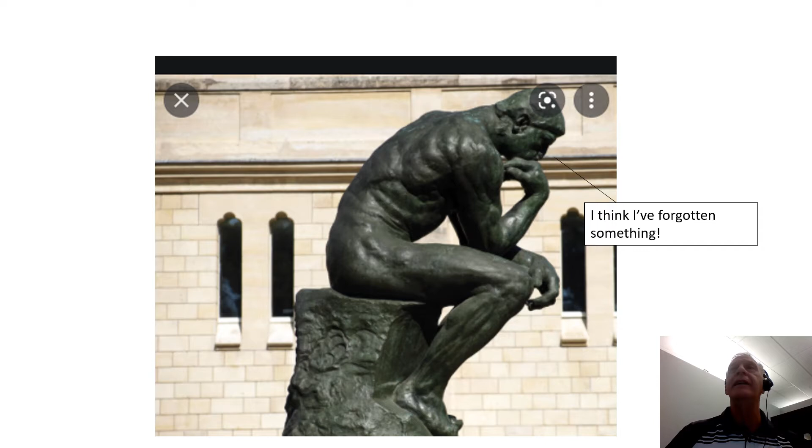The purpose of this talk is not to give you a lot of final results and detailed measurements, but rather to stimulate your thinking about super efficient stoves.

The problem with stoves as they currently exist is that gases have high viscosity and low thermal conductivity. When hot gases strike the bottom of the pot, they form a boundary layer about 6 millimeters thick. Remember that number, 6 millimeters. Gases outside the boundary layer pretty much stay outside it and never transfer heat very well. Gases within the boundary layer move in uniform rows without much mixing. They transfer some heat to the pot, but the final result is that only a small fraction, less than half, of the heat is transferred to the pot. Usually the exit gases are not a whole lot cooler than they were when they first came into the system.

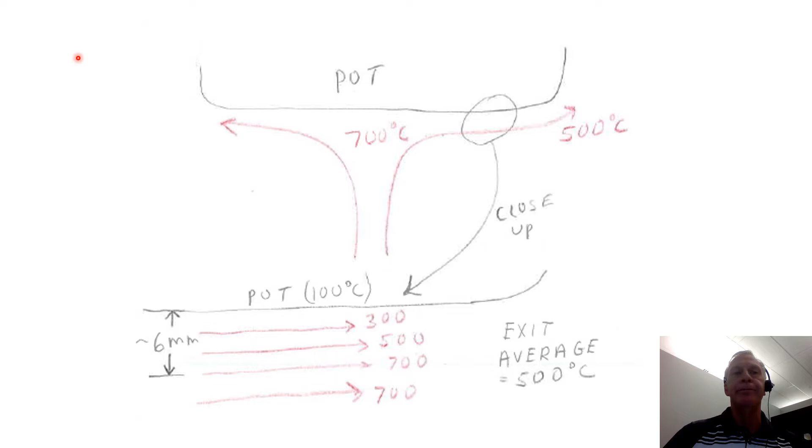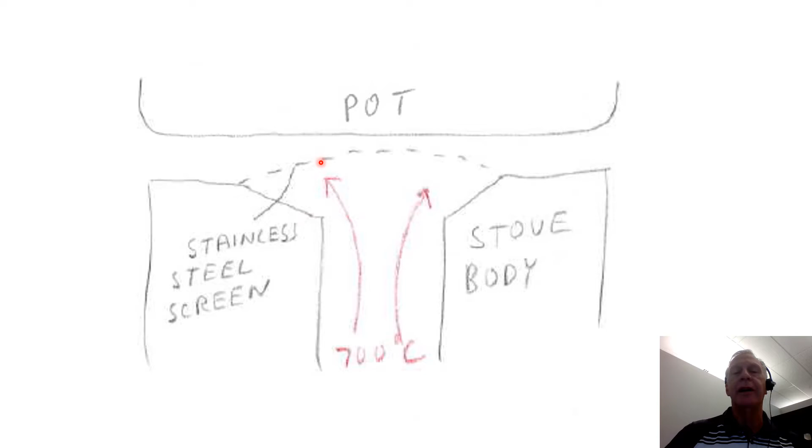This first idea uses enhanced radiation, because radiation can pass easily through the boundary layer. Here, a stainless steel screen is placed over the stove, which intercepts the hot gases and gets hot. The screen radiates heat very strongly to the bottom of the pot. The gases passing through this screen are less hot than they were at the start, but still hot enough that some heat will be transferred by convection. So you lose a little convection, but you gain a lot of radiation, for a net gain overall.

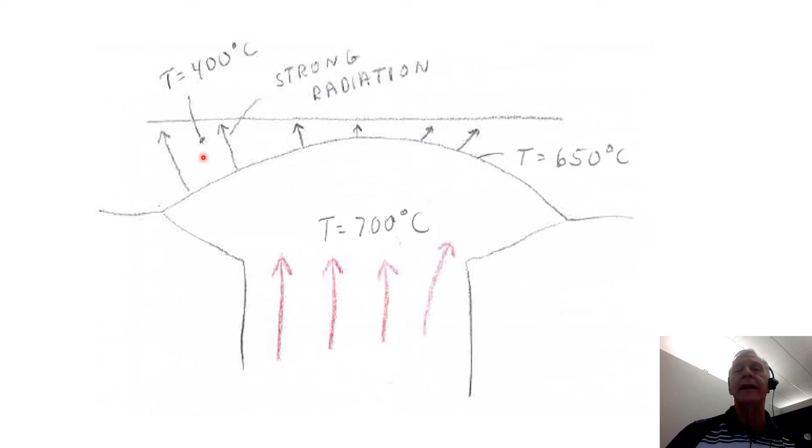The remaining ideas all work by breaking up the thermal boundary layer by forcing hot gas to flow through a narrow restriction. How narrow is narrow? A lot less than the boundary layer thickness, that's how narrow. If the pot is part of that restriction, the heat transfer to the pot should be excellent. And because you have such narrow restrictions, a small fan or blower will probably be needed. I'll say more about that in a little bit.

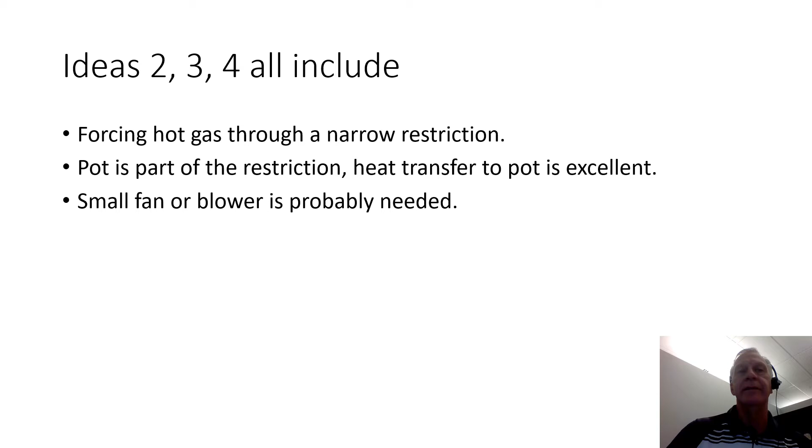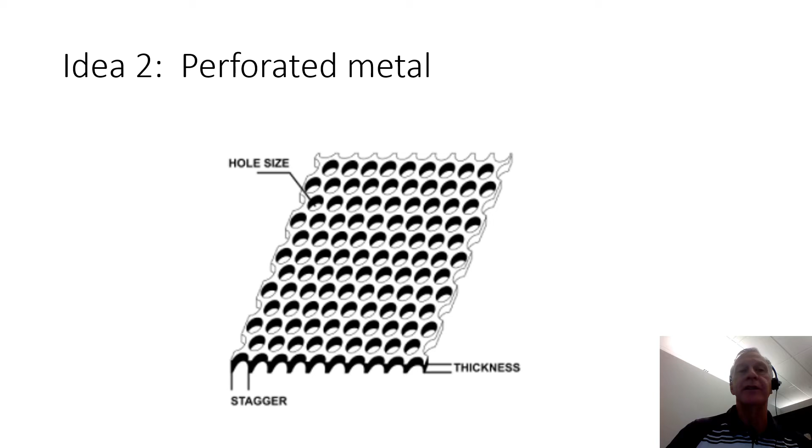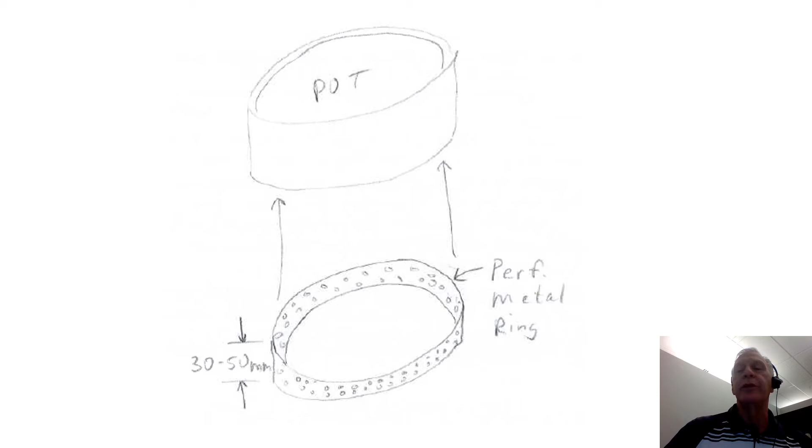The second idea uses perforated metal, which is available in a wide range of sizes and dimensions. A ring of perforated metal is bonded to the bottom of the pot, either by welding or brazing. In reality you'd probably use more like 3 rings, but I'm only showing one here for clarity - and I acknowledge these are not exactly 21st century graphics, but imagine I'm standing at a chalkboard, perhaps covered with chalk dust, writing really, really fast. So the ring or rings of perforated metal are bonded to the bottom of the pot. The hot gases flow through the small holes in the perforated metal, which gets very hot and conducts heat into the bottom of the pot.

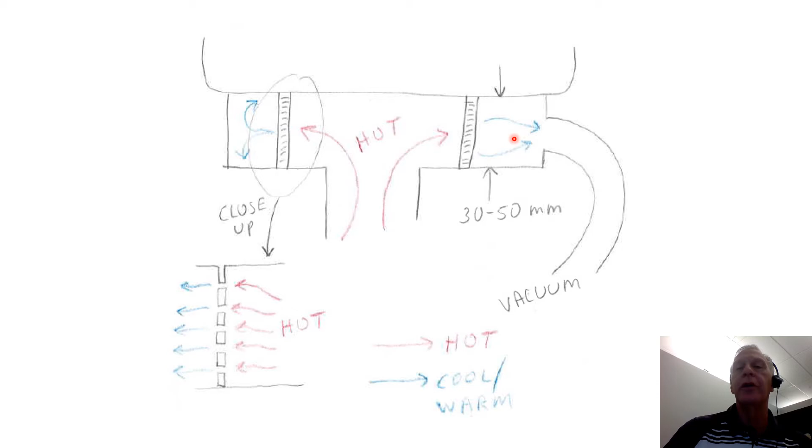A vacuum system, about which I'll say more later, is used to force the gases to flow up through the stove, through the small holes in the perforated metal ring, into the outer shell where the gases are much cooler, and then into the vacuum system. Looking at the same thing in a bottom view, the hot gases come up and out of the stove here. They flow radially outward through the small holes in the perforated metal ring into the outer shell, at which point they're much cooler, and then get sucked out into the vacuum system.

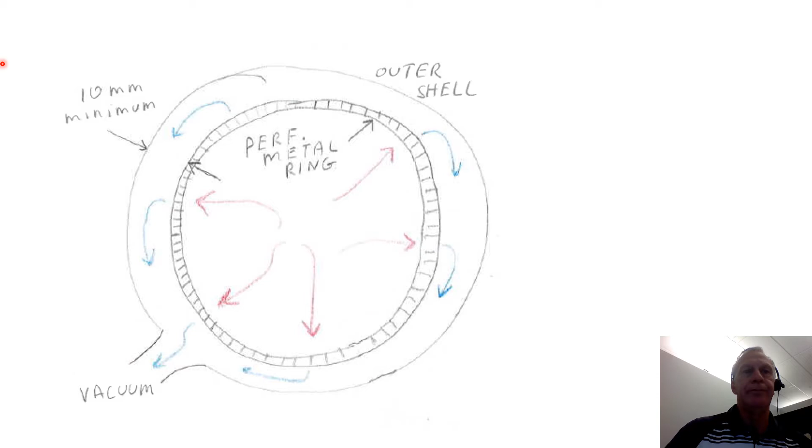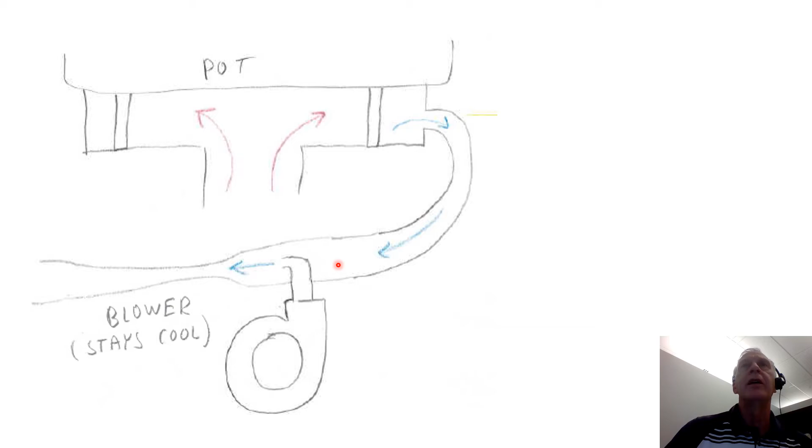There are a number of ways to produce a vacuum simply. One way is to use a small plastic blower, which costs only about $1 and consumes maybe 3 watts, to produce maybe 1 inch of water pressure. Blow that through a jet injector, which creates maybe 1/4 of an inch of vacuum, and that should be enough to get the air to flow through the small holes in the perforated metal ring. 1/4 inch of vacuum is a lot more than any natural draft stove can produce.

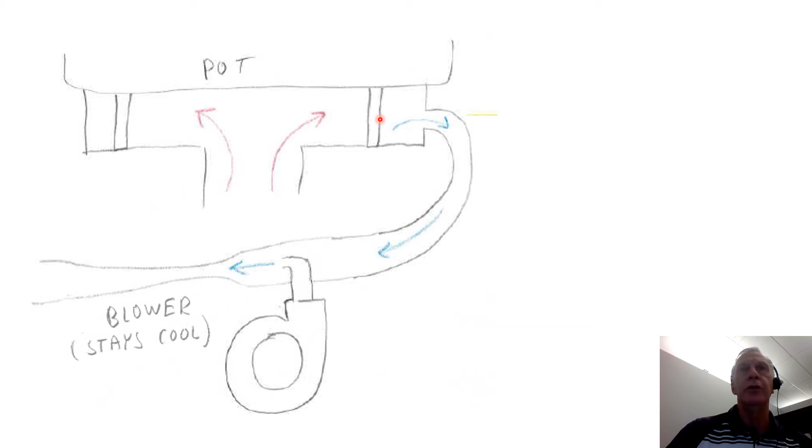The next idea is what I call the narrow gap idea, in which the hot gas from the stove is sucked into a shell and forced to flow through a narrow gap very close to the bottom of the pot. Since the thickness of this gap is much less than the thickness of the boundary layer, heat transfer from the gas to the pot should be excellent. Again, you would have a collection ring around the outside of the system and then a vacuum system to get the hot gas to flow.

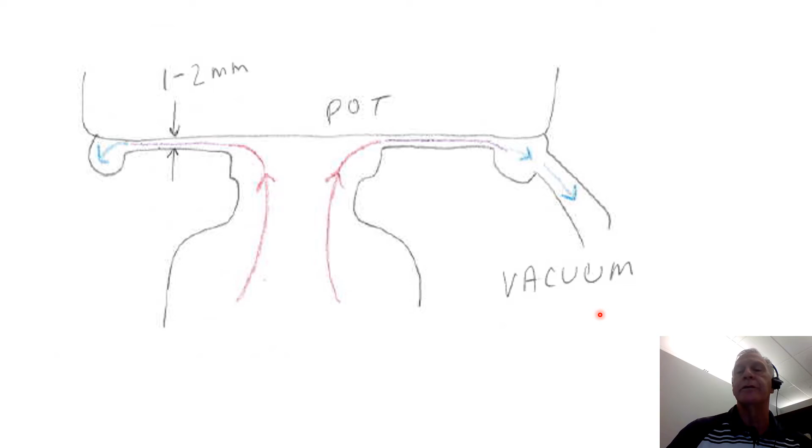On the shell, you would probably have a series of protrusions to hold the gap at its proper dimension.

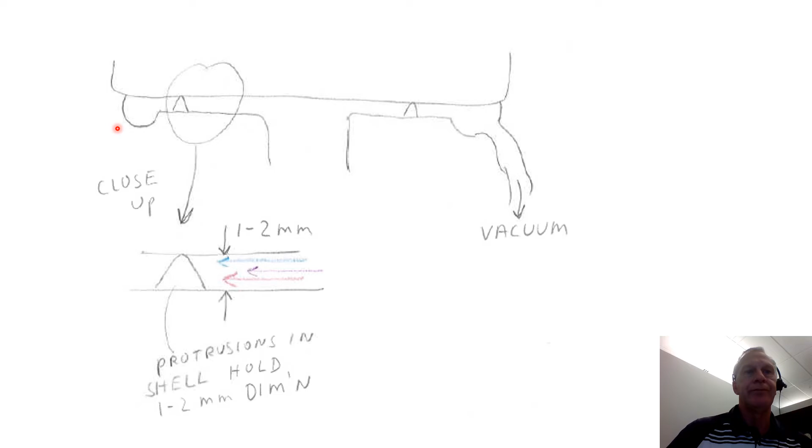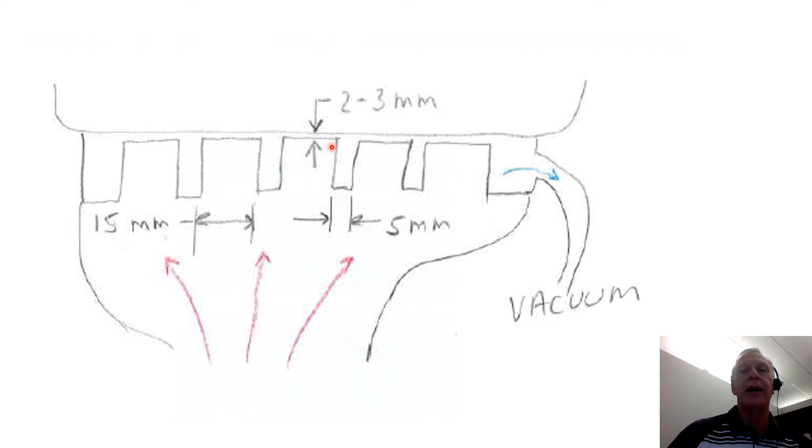The final and most complicated idea is what I call the impingement heat transfer idea. You have a corrugated metal shell with high, wide corrugations that are very close to the bottom of the pot, and then some lower, narrow corrugations down here.

In the high, wide corrugations, you have a series of small holes or a slot, so hot gas is forced to flow through that series of holes, getting excellent impingement heat transfer in this region, and then pretty good heat transfer in this region because of that narrow gap under the bottom of the pot, and then poor heat transfer in this region, but by then the gases have given up most of their heat.

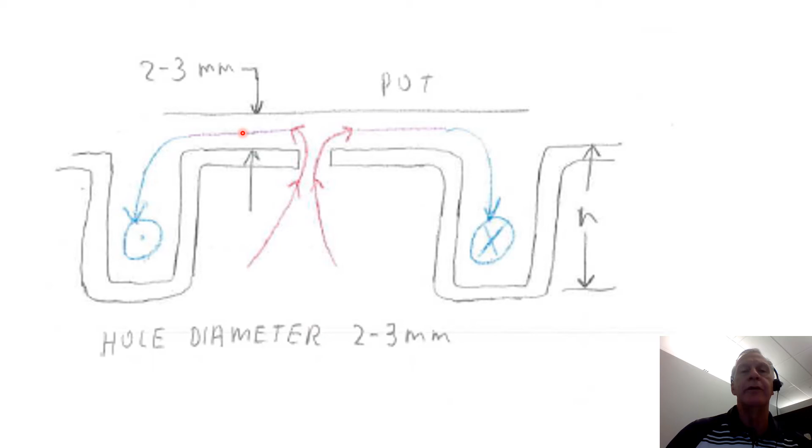They drop down into these lower corrugations where they can flow easily either away from the viewer or toward the viewer, depending on which is the shortest path. Dimension H needs to be fairly large, maybe like 30 to 50 millimeters, but you should get excellent heat transfer over this entire region of the pot, and thus excellent heat transfer overall.

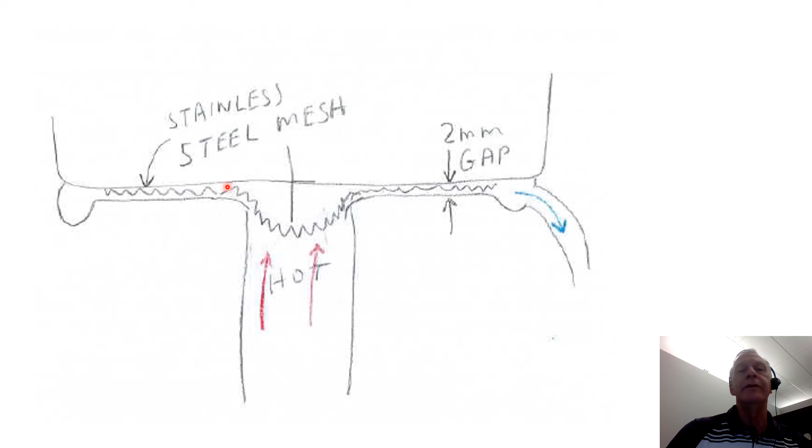You may be able to combine these ideas by putting a stainless steel mesh into the narrow gap idea, getting very good convective heat transfer because of the narrow gap, and then very good radiative heat transfer due to the stainless steel mesh.

Similarly, you could use the stainless steel mesh in conjunction with the corrugated metal idea, again to get radiation from the stainless steel mesh, and then the excellent convective heat transfer within that narrow gap.

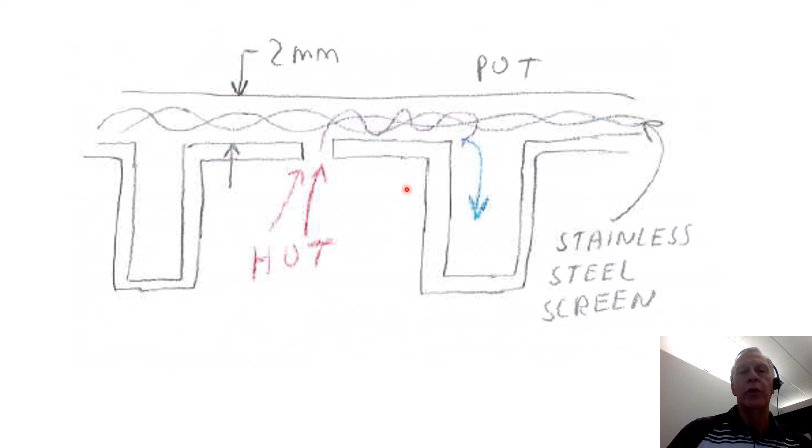In addition to saving fuel, there are practical benefits to getting higher efficiency. We've done a lot of surveys with what users really want from their stoves, and I'm willing to bet that not once has anyone ever said that their stove is just too powerful.

They will say, however, that their stove perhaps burns their delicate foods such as rice. So I believe any of these ideas can be used to get both more power and more uniform heat transfer for less burning of the food.

Since you need less fire overall to get the job done, you could possibly get by with less tending of the fire and then possibly lower cost overall.

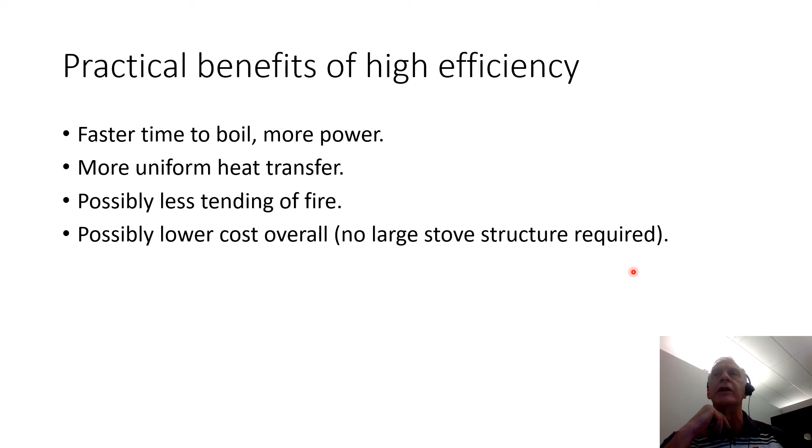What I mean by that is that our best method for getting very high efficiency currently is to use what's called a sunken pot stove, which has a lot of structure to it. With these ideas, there's a lot less structure, so I believe that you could get higher efficiency and lower stove cost at the same time.

Some limitations on these ideas are that they would typically work well for clean burning stoves only, and except for the radiation idea, flat bottom pots only. And then of course there's the extra complexity that you would need with the blower and the power to run it, which I don't think is particularly all that bad or all that much, but it is an extra step of complexity that's required.

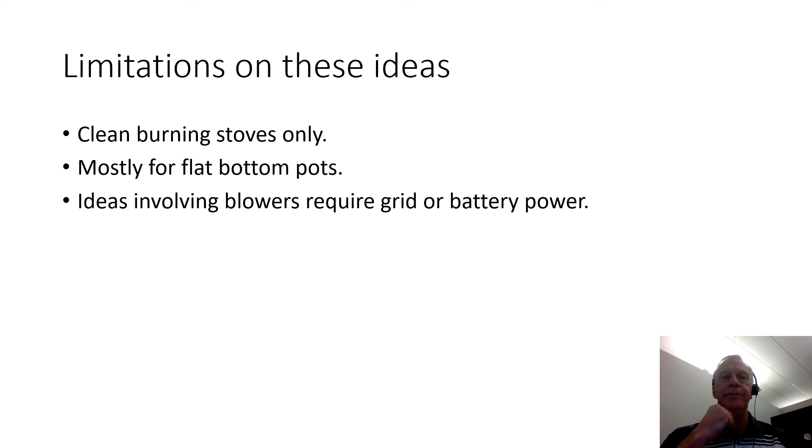Some opportunities here are these ideas would work best when the users pay cashola for the fuel and thus have a strong incentive to save fuel through a higher efficiency stove. That of course leads immediately to the institutional stoves, which fit that requirement perfectly.

I don't know that much about carbon financing, but I expect that there would be synergies here between carbon financing and super efficient stoves. And then finally, a number of people, including the people at Cal Poly and me and Larry Winiarski, have thought in terms of stored solar thermal energy used for cooking. That could perhaps be combined with these ideas using either hot air or hot oil as the heat transfer fluid.

So finally, I hope that I have stimulated your thinking with this talk and that you will do like me and spend every waking minute thinking about super efficient stoves.